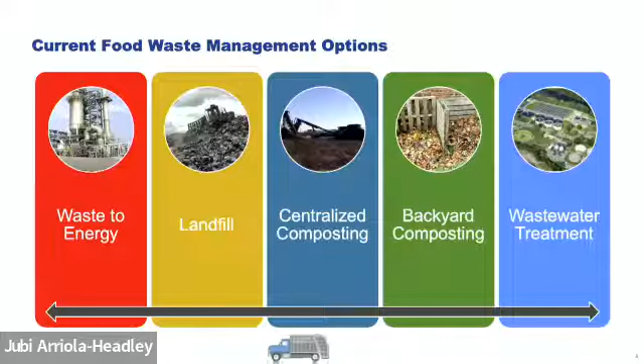Now, the first 3 methods all involve a truck. And we've heard a lot about trucks today. But of course, the disposer uses the sewers instead of a truck. And think about sending the food waste through the sewers and it reaching the treatment plant in just a few hours, as opposed to getting to the landfill and the landfill cell being covered perhaps 2 or 3 years later.

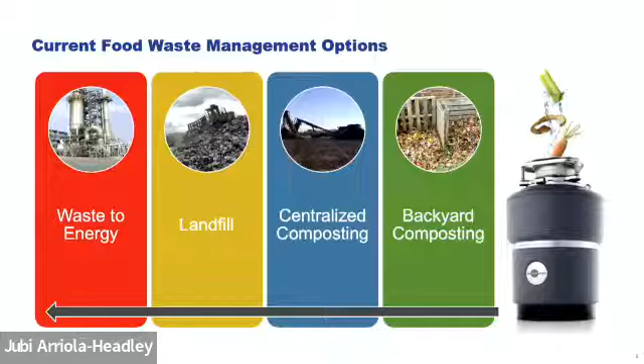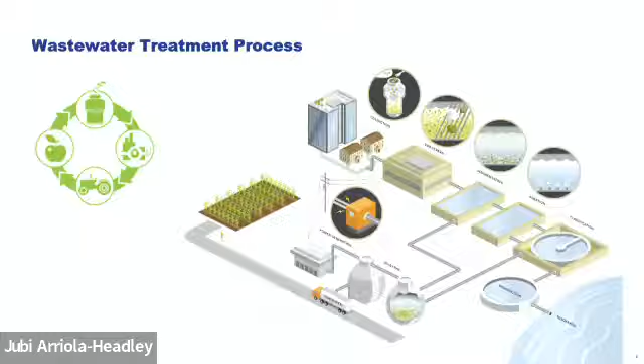The one thing I would point out in the diagram is that sometimes there's the conception that if you send food waste to a treatment plant, it's going to be filtered out in the bar racks and then landfilled anyway. Disposers grind food waste into particles that are 2 to 3 millimeters in size. They're going to go through those bar screens and into the primary clarifiers, settle out and go to the digesters.

And then the soluble carbon can go through to the secondary part of the treatment plant. And that's used by the bugs, the microorganisms, to help take out nitrogen and phosphorus before the water is discharged to our waterways. And then the residuals that are digested, if it's done so with anaerobic digestion in the absence of oxygen, you create methane. And that methane can be used in a cogeneration set to create electricity and heat.

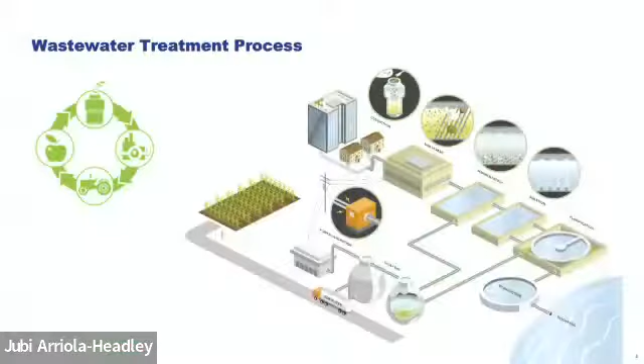Now, real briefly, I'll just point out some of the trends today in the wastewater industry. I'm doing my best to try and remember to call the wastewater treatment plant the water resource recovery facility. It's this clean water, energy, and fertilizer concept. About half of all of the residuals produced in the US at the treatment plants are beneficially reused on agriculture.

I mentioned anaerobic digestion. Unfortunately, not every treatment plant has anaerobic digestion to process their biosolids. But even though it's only about 10% of the facilities, they are treating over about 50% of all flows. And in places like California, 90% of the wastewater is treated at facilities with anaerobic digestion.

And you've got facilities like East Bay Municipal Utility District that have been making their own energy by bringing food waste from outside sources and putting it into the digesters. At one point, they were creating more than 200% of their energy demand by bringing in food waste. So that's not going through the sewers, that's being trucked in and put directly into the digesters.

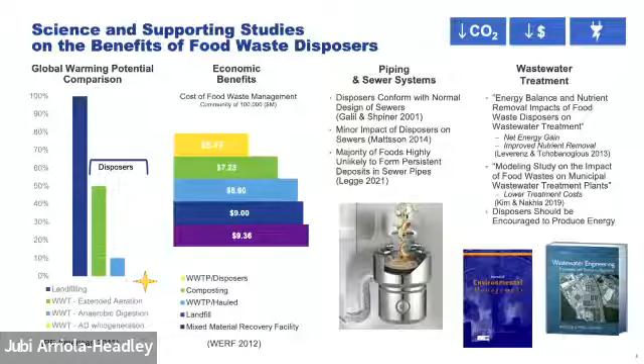We followed that up by working with George Nakhla at Western University in London, Ontario, and it was published in the Journal of Environmental Management in 2019. He did 142 different scenarios and proved that indeed you do create more energy by using a disposer, and you can reduce the nutrients, and it actually reduces overall treatment costs because of those two things.

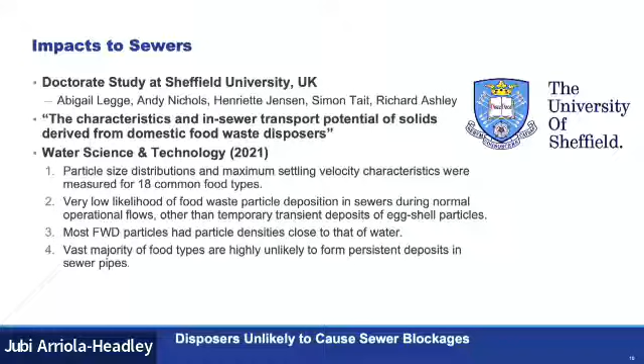Here's the Sheffield study. There's been multiple papers that have been published, but this one in particular looks at the characteristics and in-sewer transport of solids derived from food waste disposers. It was published just last year. They looked at particle size distribution, settling velocities in the sewers. They did some video camera work. The bottom line is that there were negligible impacts to those sewers from disposers. The only particles that did briefly settle out were eggshells, and they are reanimated, if you will, and put back into the flow when flow increases back through the sewer.

I mentioned the textbook. I actually attended the conference where George Tchobanoglous shared the results of his research, which then led to this quote that's in the textbook: the challenge in the future is how to extract energy from wastewater most efficiently. We should be encouraging the use of kitchen grinders. So that's in the latest edition.

But at the end of the day, because of the methane being used for energy in the anaerobic digesters and the supplemental carbon that offsets the need for methanol, for example, to reduce nitrogen and phosphorus in the treatment plant's effluent, you have a net lower cost of wastewater treatment by sending the food waste through a disposer to a treatment plant.

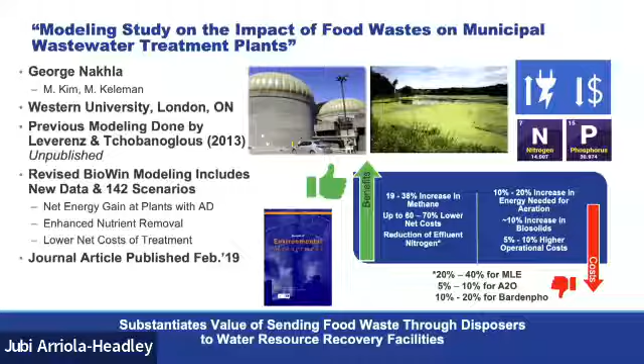So we did a study in 5 different cities, including Milwaukee, Philadelphia, Tacoma, Boston, and then eventually Chicago. And what we wanted to do was find out what the effective use of a disposer was. Because if you think about it, once you put the food waste down the disposer, it disappears. You just don't know how much is being processed.

So we found a neighborhood in each one of these cities where they had no disposers, and we installed somewhere between 70 and 90 disposers in each of these neighborhoods. We measured how much food waste was in the garbage before they had a disposer, waited a year later, and went back and did a follow-up waste characterization.

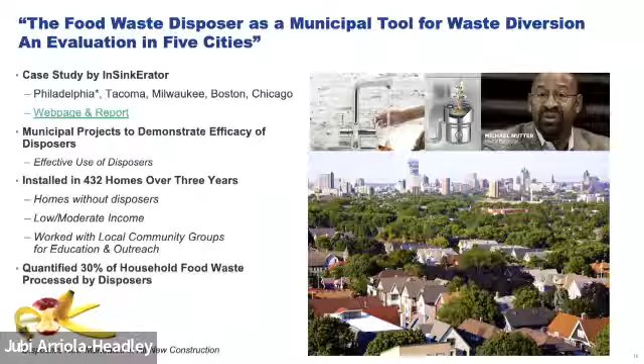And very consistently, all 5 cities, or at least 4 out of the 5, determined that there was 30% reduction of food waste in the garbage. We had inconclusive results in Chicago. We worked with local community groups to do the education and outreach. And this 30% ended up being very important because we took it to the EPA.

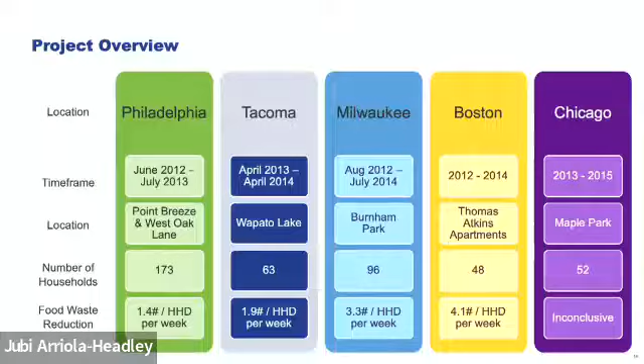Here's just further detail on those 5 cities we worked at to determine the effective use of disposer. You can see we did 173 households in Philadelphia. And eventually, after this study, they passed a law where you have to install disposers in all new construction. The results were very consistent from a percentage point of view, but it's about 1 to 4 pounds per household per week were being processed in the disposer.

The EPA has their food waste or food recovery hierarchy. And as I said earlier, it's always best to reduce it at the source or feed hungry people or feed animals. But at the end of the day, there's always going to be unavoidable food waste. Think of your fruits and vegetable peelings. So my mantra is reduce the avoidable, but responsibly manage the unavoidable.

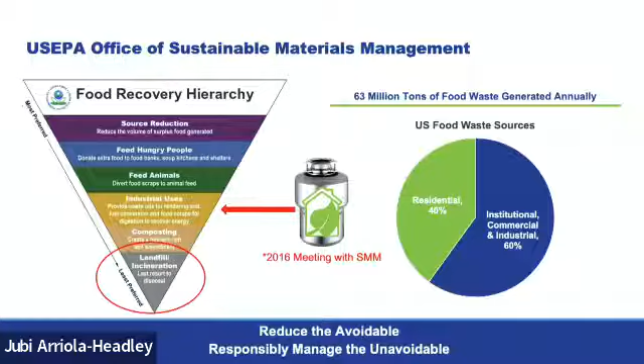The 4th layer down in the hierarchy is the industrial uses. Unfortunately, almost 60% of our food waste still goes to a landfill. The disposer is in that 4th layer, industrial uses, and the EPA told us when we met with them in 2016, disposers are already implicitly included. If your city has anaerobic digestion at their wastewater treatment plant, it's a good option. This led them to include disposers in the 2018 report.

So there's a quick summary. I've touched base on all these, but what I want to do is a quick demo. The most important thing with a disposer, because either you, your neighbor, your relative, your partner, or somebody has at some point had a problem, right? They're worried about clogs. We're trying to do a better job as a company.

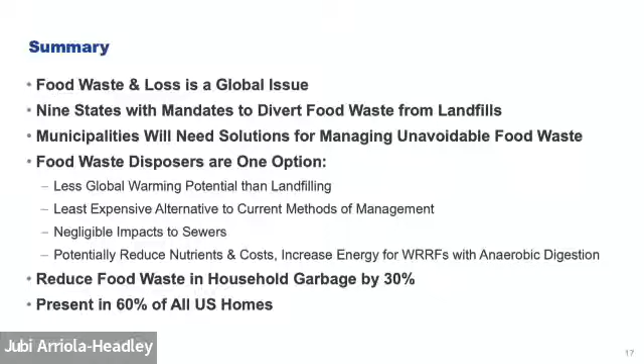We want you folks to understand the best way to properly use a disposer, and you can virtually grind all your food waste if you do this properly. Turn the water on first, turn the disposer on second, add your food waste slowly, and when it's done grinding, just let the water run for a few seconds. So Casey, you want to give

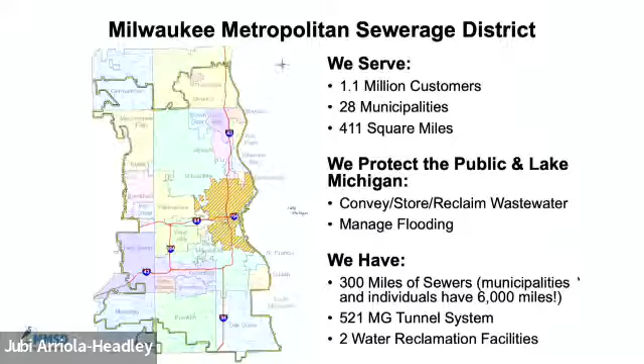And we had a system which has 28 different municipalities, 1.1 million people, 411 square mile area. So this is metropolitan Milwaukee, Wisconsin. We're about an hour and a half north of Chicago, sitting right on Lake Michigan. And our job is to treat wastewater. We also do flood management as well.

The key thing is we have 300 miles of pipe that we operate, and our municipalities have about 6,000 miles that they operate. So we have this great collection system from every house, every business, every industry that has a toilet, a pipe system that connects it down to our two water reclamation facilities. I'll show you those in a minute. You've already seen Jones Island. We also have a deep tunnel system, which helps us manage overflows during heavy storms.

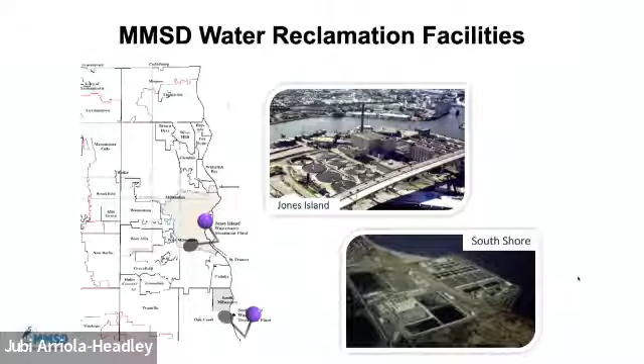So you saw a picture of Jones Island from Michael. It's that upper little pin that's in the map there, and the lower pin is the South Shore Water Reclamation Facility. So Jones Island's been operating since 1926. South Shore has been operating since 1965. And it's the basic treatment that goes through almost every treatment plant in the country. Some of them have an extra step called tertiary, which allows you to reuse the water. We don't do that. But preliminary, primary, secondary, disinfection, discharge to the lake.

So in 2009, I wrote a vision that said, on the left side of the brain, I want to have an integrated watershed management approach, zero overflow, zero homes in the 100-year floodplain. We're working on that. We're pretty close actually on that.

On the right side of the brain, it's the climate adaptation mitigation steps and trying to become more renewable with our energy. So we want to be 100% renewable with energy, 80% of that being self-produced. And then we have other efforts to reduce our carbon footprint and to sequester more carbon. But that 80% self-produced is where the food waste from the residential customers comes into play.

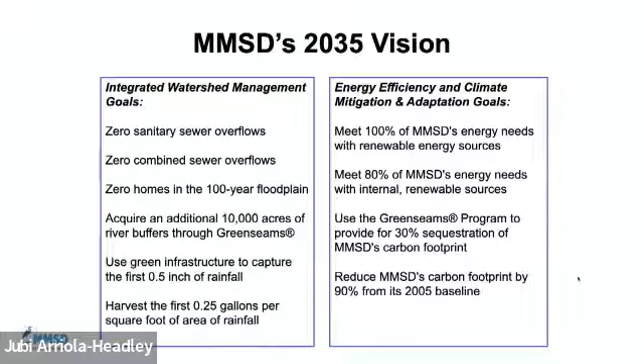Milorganite, Milwaukee Organic Nitrogen, been producing it since 1926. I saw some people raise your hand. Thank you. Keep buying it. That offsets our rates about $10 to $11 million a year so that we can save our ratepayers that amount. So when you go back to the theory of biosolids, clean water, we like biosolids because we can produce more Milorganite. We can sell more Milorganite. We can offset our rates.

We're actually, since the pandemic started in 2020, producing less than we're selling. So people are buying it up, I think, because they're at home more now. So we're selling more Milorganite than we can make. So the more we can get, the better we are.

So again, before we even talk about food waste, we have 2 wastewater treatment plants. They're about 12 miles apart. And at South Shore, we have digesters where we can digest the sludge, the biosolids that come into the system. We take that digested material and we pump it 12 miles to Jones Island, where it gets mixed into the digested sludge at Jones Island, and that's where we make Milorganite.

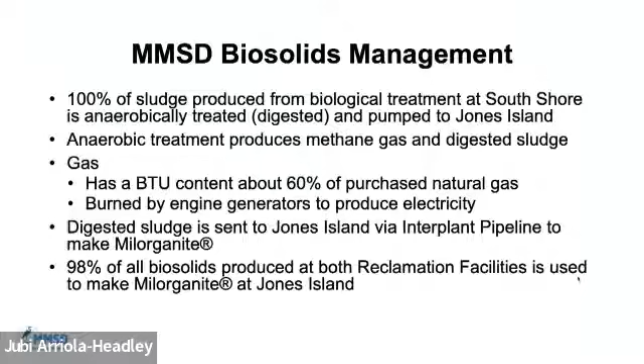We have the anaerobic digesters at South Shore, which produce methane gas as well. So at South Shore, we're getting energy through methane gas, and then we're taking those digested biosolids and sending them to Jones Island for Milorganite. So it's very sustainable. And up until now, it's the same system that's been in place for 80, 90 years.

The gas that we get through the digestion is about 60% of natural gas. So it's not natural gas, but it's pretty close. And it's burned in engine generators to produce electricity. As I said, we take the biosolids, we take those to Jones Island, we make Milorganite out of that. And about 98% of all of our biosolids are produced into Milorganite. Sometimes we have to farm apply. We've not had to do that for a while.

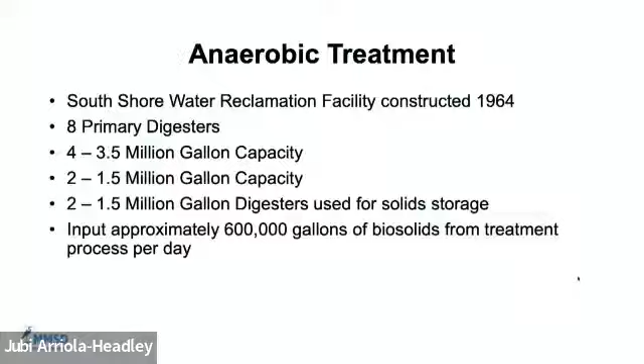At the South Shore facility, again, in '64 they were constructed, operation '65, 8 digesters, different capacity. They're huge. They're huge underground tanks. And they take about 600,000 gallons of biosolids a day, just from human waste, not any food waste yet. There's probably some in there, but yeah. Here's the digesters.

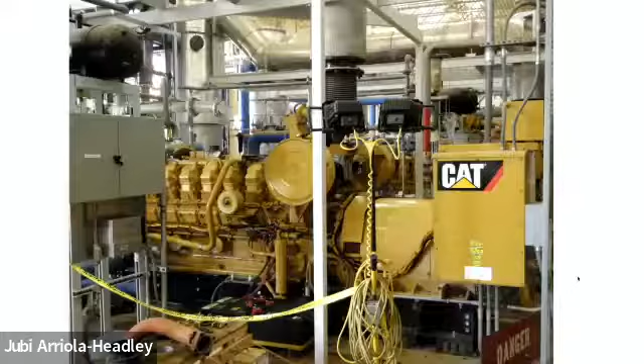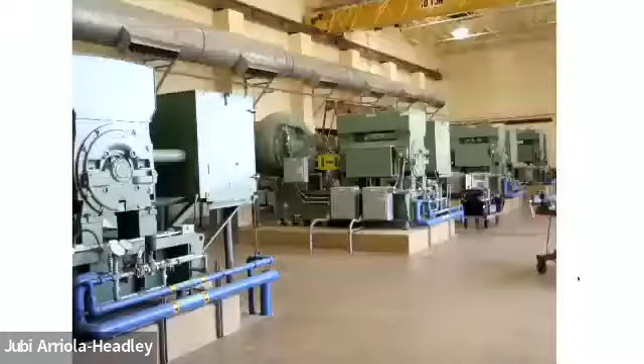We collect the gas off of those digesters and store them in these cylinders. And then we use that in these engine generators to produce electricity at our South Shore plant. Here's just some pictures of some of the generators. And then on the occasion where we can't use all the gas they're producing, we have our own flare that we then flare the extra biogas from.

So that's really the system that was in place pretty much up until the mid-2000s. And we thought, wow, what an opportunity. And InSinkErator approached us and we said, what an opportunity. We could do more with what we already have built.

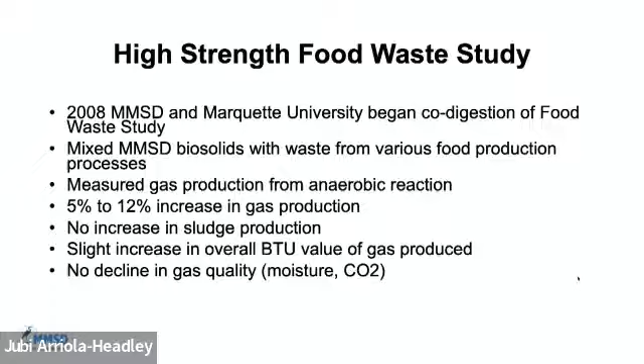So we did a study with Marquette University on co-digestion in 2008, had food waste mixed with the biosolids, measured gas production. We thought we'd see about a 5 to 12% increase in gas production, and negligible or very small increases in sludge production that we saw. We saw an increase in the overall BTU produced and no decline in the gas quality that we'd already been producing. So we increased our self-produced energy.

This goes along with the vision that we set in 2009, 2010, completed construction of an offloading facility. So if you have grocery stores, restaurants, places that want to send their food waste to you, you need to have a place to receive it.

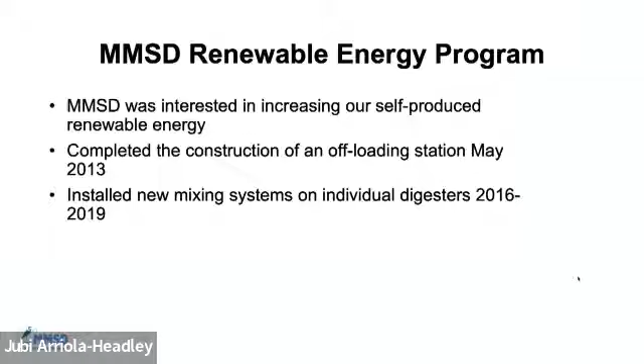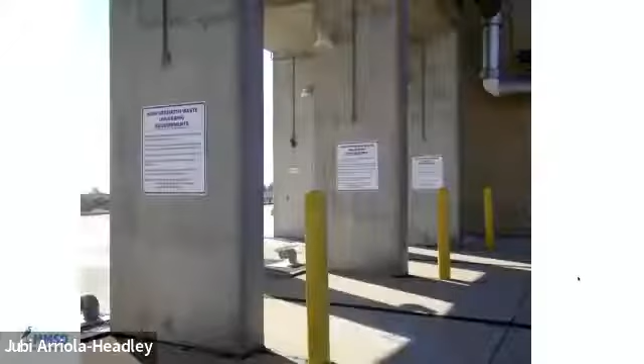Here's the offloading facility we built. So trucks come in here, offload their material. Another picture. We call it high strength waste in wastewater world.

So in 2016, we started working with InSinkErator more vigorously with the Grind2Energy program. And from '16 to '17, we're averaging about 350,000 gallons per year of material that we would receive. The pandemic hit and that slowed deliveries down significantly. Picked up again in mid-August. We had a local digester that closed that was taking a different type of material. And that started to come to us then.

Well, here's the bang for the buck. About 0.6% of our total digester feedstock is from high strength waste. So it's not a lot of feedstock that we're taking above and beyond what we were already taking before. But it's producing about 9% of our total biogas production. So we're getting more energy from that 0.6% that we can use in our generators to produce electricity to lessen our cost for energy. And approximately 40 to 60 million cubic feet of digester gas is derived from this high strength waste in 2021. And we're estimating that saves us between $130,000 to $260,000 per year.

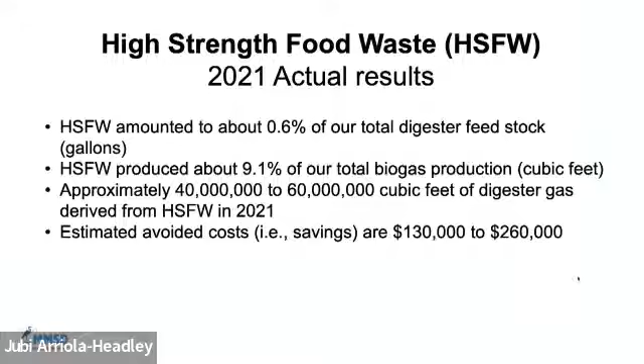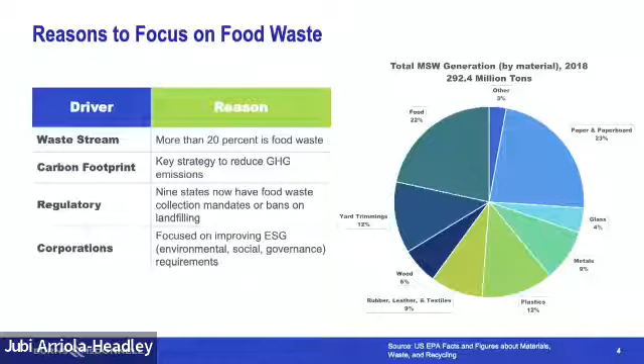And then from a corporation perspective, we are seeing a huge increase in interest from an environmental, social, and governance perspective. This is a key part of what I discussed with this group at my presentation last year. But effectively, you're going to see more and more companies, for example, the grocery stores that Kevin referred to, that are going to be looking for ways in which they can divert this type of material. So I think it's really important as cities for you all to really start thinking about, if you haven't already, what are going to be some of the strategies that you put in place to address this.

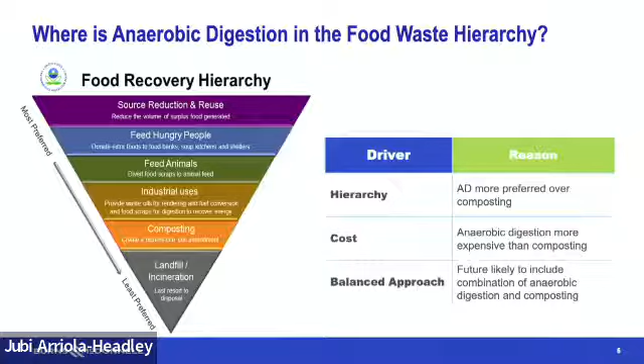You all may also be asking yourself, well, what is all this going to cost? And so much of that really depends from an anaerobic digestion perspective. If you have to go out and build a brand new facility, that's going to be much more expensive than, as Kevin talked about, where you're just able to make some capital or operational improvements to your processing system.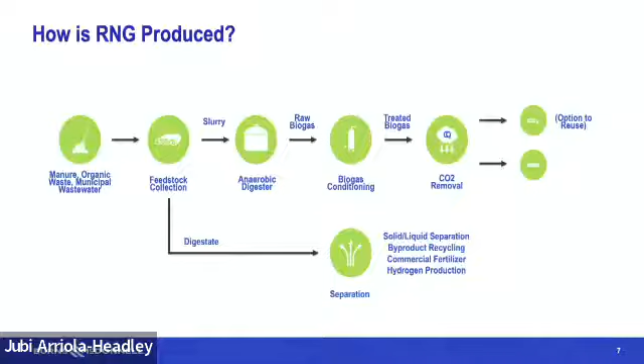Then that material at some point needs to be chopped up via some type of a macerator, whether it's a disposal, or it could also be a bigger macerator, either at the site of, say, a hotel here like the Marriott, or it could be a macerator that is on site at the wastewater treatment plant. But at some point, that material does have to be processed into a slurry. And from there, it can go into the anaerobic digestion system. So there's a number of steps that occur during that process.

But ultimately, you can then have a gas that can then be utilized either for electricity. You can put it for use directly at a site to generate heat. Or what I want to talk about today is what about the idea of taking that gas and making renewable natural gas to fuel vehicles.

So who is doing this around the country? Here's just a couple of examples. This is actually a slide from Energy Vision, which is a group that we've worked with on a few projects as they work with communities to help figure out opportunities to make this into a reality. And a couple of projects that they've talked to us about: one is just in Northern California and another one in Grand Junction, Colorado.

So in both cases, they are able to send food waste to anaerobic digesters and then be able to utilize that fuel to run, in the case of the San Francisco example, about 10 to 12 private refuse collection vehicles. And for Grand Junction, Colorado, they're able to power about 40 vehicles within their broader municipal fleet.

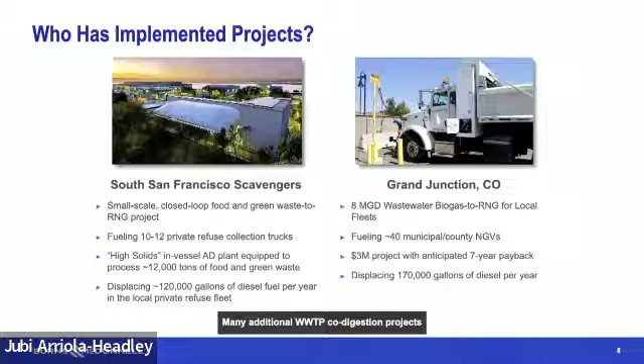So as a solid waste director, what are some key questions you're hopefully starting to think about? So one first question, and I'll go through these in a little bit more depth individually, but from a sector perspective, where do you focus your efforts? Should it be on the residential and/or the commercial sector? What about the concept of vehicle fueling? Why should you even be thinking about this? We've heard so much good discussion at the summit about electrification. Where does RNG fit in this? Is there a logical case for RNG?

From a wastewater department perspective, should you go and take the director of the wastewater department out for lunch? So, in all seriousness, to make this work, it's got to be a collaborative effort on the wastewater side.

Rick, you gotta take yourself out to lunch since you have both roles.

So from a funding perspective, there's been so much activity lately. I want to touch a little bit on what funding is out there. And don't worry, I've got a great resource that I can refer you to as well for that information. And that's the last point of, hey, Scott, is there a good reference guide out there? And I'll give you a hint, it's a Burns and Mac report.

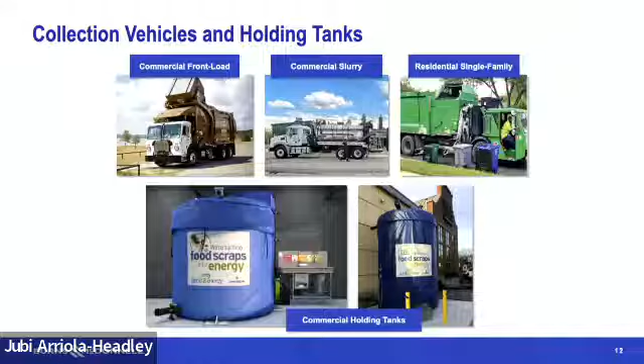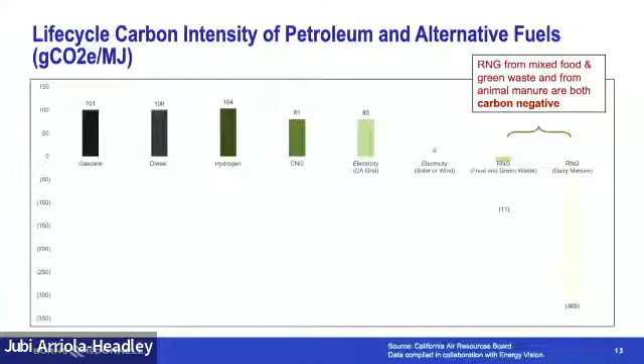So as I mentioned a few minutes ago, there's been a lot of great discussion, not only at this summit, but over the last couple of years about electrification of vehicles. And I just wanted to provide some context because I think a lot of times renewable natural gas gets overlooked in that discussion. And I think from a carbon life cycle perspective, RNG actually provides a significant number of positive impacts. So what this slide communicates is the life cycle carbon intensity of various petroleum and alternative fuels. So the higher the number, the greater the carbon impact is. So you want to have as low of a number as you can.

So going from left to right, gasoline, diesel, and hydrogen all rank about the same. And then we see CNG and electricity, if it's based off of whatever's coming off of the traditional grid here in California, because this is data from the California Air Resources Board. But then you start to see very positive benefits from electrification if you're able to source that from renewable sources like wind and solar. But when you get into renewable natural gas, either from food waste on the left-hand side or from manure on the right-hand side, that's where you actually get to a carbon negative perspective.

So one of the reasons for that is if you think about, for all of these processes, what's the level of effort associated with the utilization of these fuels? And it's just much less effort and correspondingly a lower carbon impact through the use of renewable natural gas. What are some of the benefits of utilizing RNG? First off is, as I just showed on the preceding slide, you're able to significantly reduce emissions.

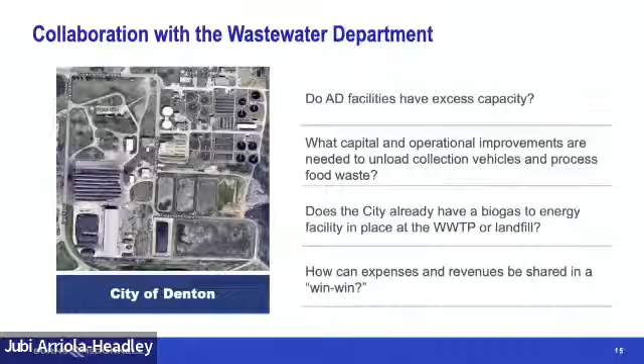But as a solid waste director, when you take the wastewater director out for lunch, you need to talk to them about, hey, do you have any excess capacity within your anaerobic digestion system? On the next slide, I'll talk about the city of Dallas, and they happen to have at one of their wastewater treatment plants significant excess capacity because of prior successful water conservation efforts.

It's also really important to start to get an understanding of what type of capital and operational improvements are going to be needed. As Kevin showed, that facility was never originally designed to be able to take in those trucks. And so they did incur costs in building the capability to take in that additional material. And then does your city already have some type of a biogas to energy system in place, either as a part of the wastewater treatment plant, or it could be on the landfill side? And then how can you collaborate together to recognize, yes, there are going to be additional expenses, but then there may be additional revenue as well to create a win-win partnership.

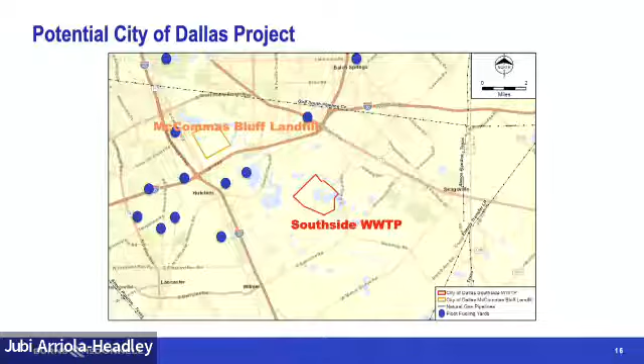So with the city of Dallas, here we looked at, again, because they have significant excess capacity, sending food waste to their Southside wastewater treatment plant. The city of Dallas McCommas Bluff landfill is located just a few miles away from that facility and at the landfill, they already have an existing biogas to energy facility that's already making renewable natural gas. So the idea here would be to send that gas from the wastewater treatment plant to the facility that's already at the landfill. That could be done either via pipeline, or you can compress the gas and truck it over there. And then all of these blue dots are various trucking facilities in the immediate vicinity that are really just prime customers for the use of this RNG, including City of Dallas vehicles as well.

So in terms of funding sources, there's lots out there on the funding side. Yesterday, somebody talked about an example of getting dollars from the Volkswagen Clean Air Act, but there's a bunch of other ones on the reference guide that I'll show you all in a few minutes. We actually have a part of that report that talks about all of these funding sources in great detail. But I did want to briefly highlight one of them, which is the Inflation Reduction Act. This is literally hot off the press.

Right now, the U.S. Treasury Department is reviewing the legislation to see what that means from a tax perspective. But in a nutshell, a key part of what this involves are private sector tax credits, to where you can get, if you are a private company, up to a 30% investment tax credit. And then you can get bonus percentages of tax credits depending on other factors, like if you can have domestic content bonus, or if you develop this in areas that have either had brownfield issues or significant investment in petroleum efforts in the past. And there's also an extension of the alternative fuel tax credit.

Now, if you're a municipality, you may say, well, hey, can we go out and just do this on our own? And is there any financial provision for that? So the legislation does allow for what's called a direct pay provision. But our understanding, and again, this is going to be subject to what the Treasury Department ultimately decides, but if you run the numbers, there's generally going to be a better financial amount of dollars if you go with the private sector tax credits rather than the direct pay provision, which would then mean from a public sector perspective that you would then need to consider a public-private partnership. And then that creates a whole additional level of financial analysis, because you're going to need to share those expenses and revenue with the private sector.

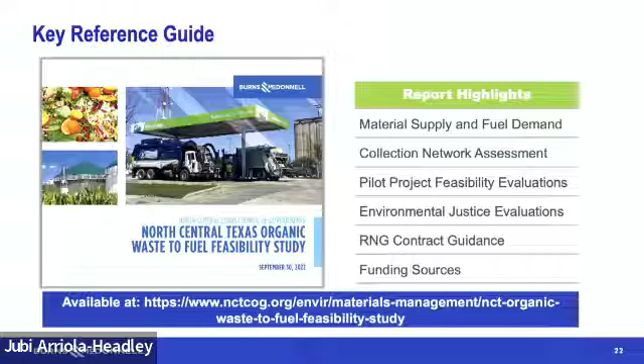If you want to get a sense of what our thoughts are in terms of cost per collection or cost per ton, comparing different collection options, that's evaluated there, as well as information about the case studies for both Dallas and Denton, as well as the contract guide information, as well as funding information, as I talked about on the prior slide. So with that, we'll be happy to answer any questions that you may have.